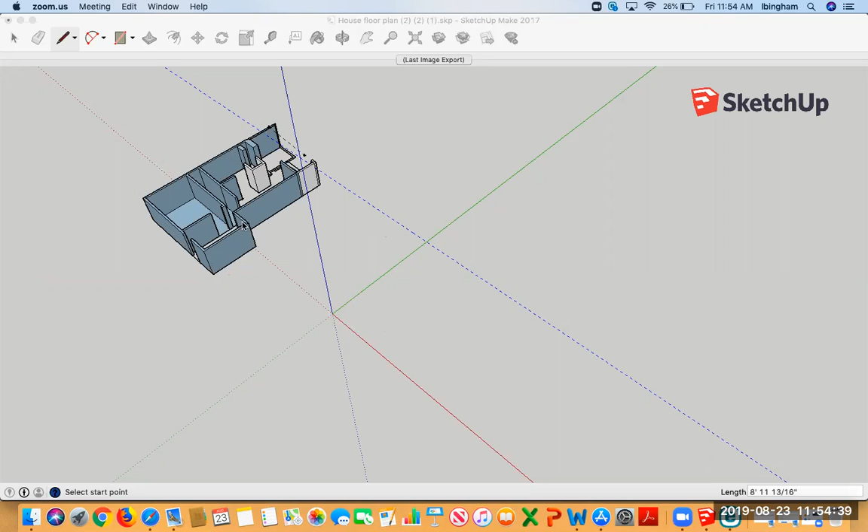And I think that's what caused all of the problems that you're having. So I did some quick measurements. I don't know if they're exact, but I just want to show you how to restart this.

So I'm going to keep this here as a guide, but I'm going to use the pen tool, and you simply want to just create the shape of your house. I'm having a little bit of a hard time understanding this section right here, but I'll just kind of make it up and then you can change it as you need to.

So my quick measurements show me that this first wall, this whole side of the house right here, is 25 feet. So I'm going to start by drawing a line that's 25 feet.

What was happening to you was because you didn't start right here in the corner, I think a lot of your lines, see how this line is black like this? A lot of your lines were like that, and that means that they're not actually on the red or green axis, meaning they're not flat. So like if I drew this line right here, it might actually even be going up and down in space and not straight across. And so a lot of your walls are actually at different planes.

Some of them are higher than others, and so they're not connecting well with each other. So this first wall is 25 feet. My pen tool actually wants to stick, see that? It sticks to the red. So I know I'm on the red axis, so I'm going to type in 25 feet. So there's my 25-foot line.

Then I come this way 12 feet. And notice how, again, my pen wants to stick to the green axis. That's good because I need it to do that. That's how I know I'm still on the same plane. If I draw a line that looks like it's parallel to that other green axis over there, it's not actually parallel, and that's where your issues are coming from.

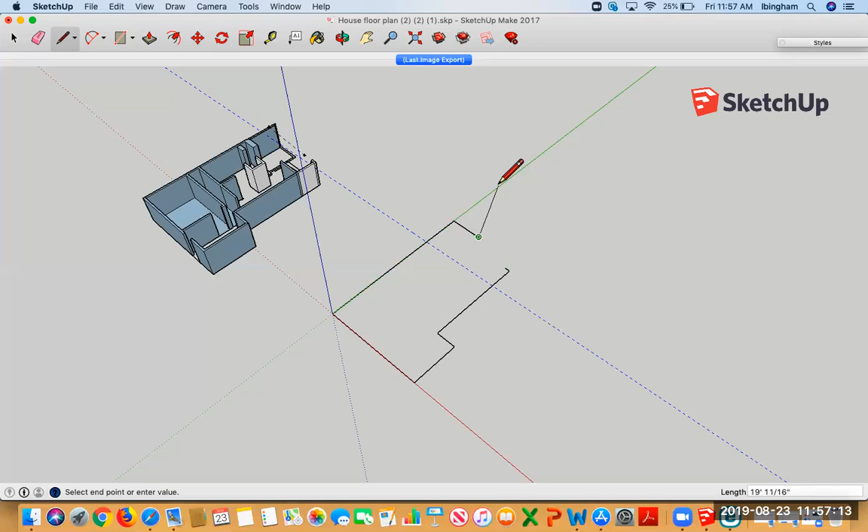And now what's going to cause problems is if we don't actually connect to this space. So if I look at your model over here, what I'm going to try to do is I'm going to actually just kind of connect to this here.

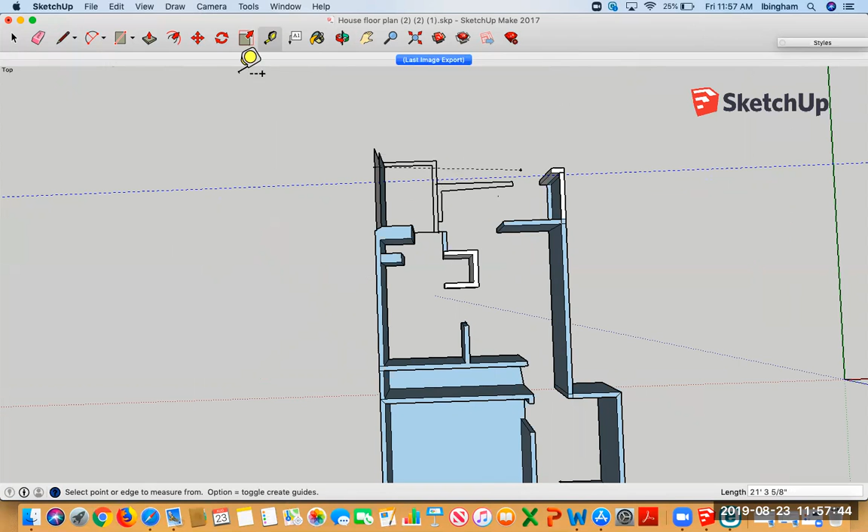So let's see how big this is right here, from there to there, 2 feet 10 inches. All right, I'm just going to call that 3 feet for now. You can totally change this if you want to. But this comes in 3 feet on the green axis, which should connect those. That's perfect, that's exactly what I want.

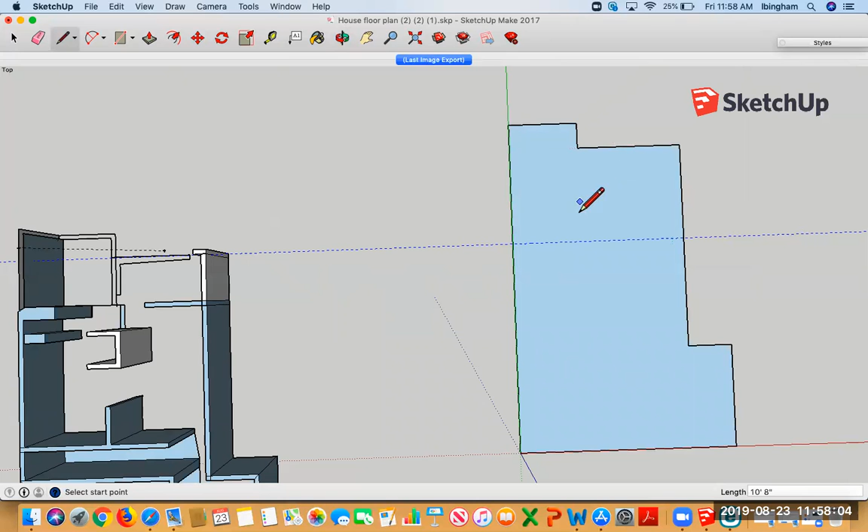So now I have the basic shape of your first floor plan. And notice how it's blue, that's how I know it's all connected. It's perfectly flat, perfectly flat. See, even from this angle, you can tell some of your walls are actually lower than others, and that's what's causing you a lot of problems.

So now that I have this shape, this is where I can make that 6-inch wall all the way around. And then once you've done that, you can actually draw in the other walls that you need that are inside of this space, and then you can cut out different sections of them.

So even I'm having trouble remembering how I got to extrude that. Let's see, the offset tool, I believe right here. That's what we want. All right, so we're using the offset tool.

Now we can get our 6-inch wall, I believe, is what I told you to do. There we go, and we'll build outwards. So 6 inches, there we go. I need to delete this inner one here. All right, so now that gives you a 6-inch wall, and you know that this is all perfectly flat.

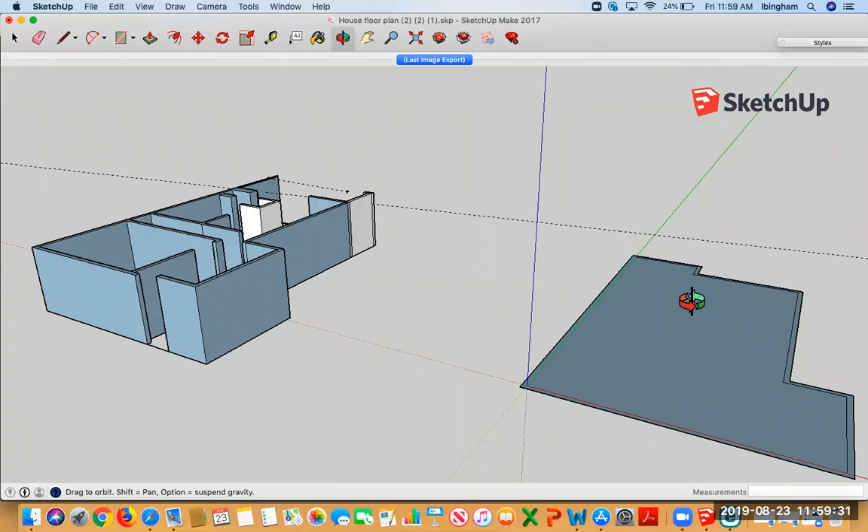So now what you can start to do, and another thing that might be helpful to you too, is to actually view this from the top before you push and pull. You can do that by going to the camera, going to standard views, and clicking top. And now we're looking from the top.

So now it's very easy for you to see that 6-inch wall all the way around, and you can actually start to use the pen tool again and just draw in the other walls that you need. Let me show you what I mean by this.

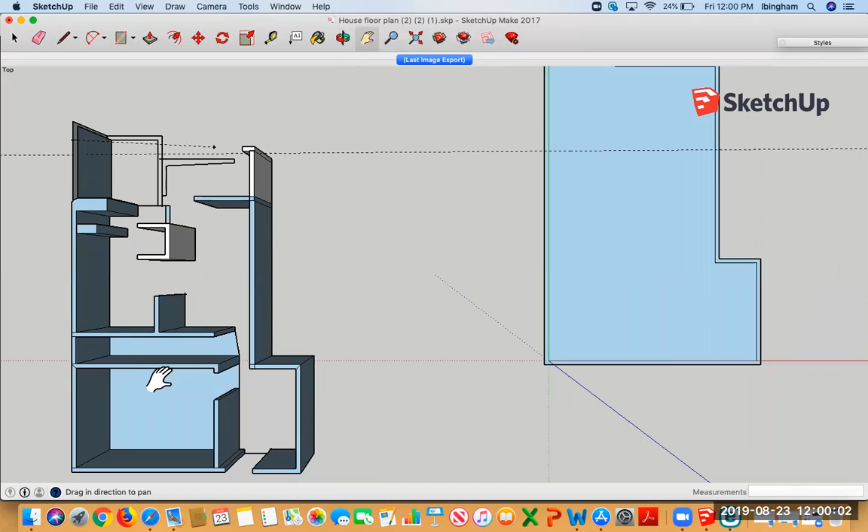So for instance here, I'm not going to do any measuring because that will just take me too long, but just so I can show you, like you have a wall over here, this one right here. So I'm going to actually draw that in here.

Say it comes to like right here. I would be putting in all my measurements, but see, we're on the red axis or we're on the green axis. It always has to be that way, otherwise it's not flat. And you want to draw in every single thing that you have here.

Like here, you could make a new shape in here, and that's your doorway. So eventually you just cut that out.

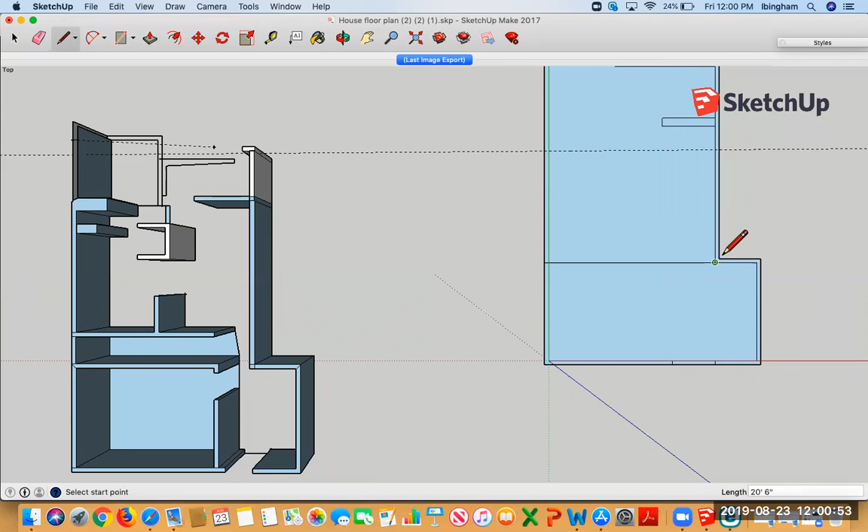And then like you have a wall over here, we can actually make, if this is lined up correctly, we could... there we go. And so then you could figure out like how far it comes out, and then you would

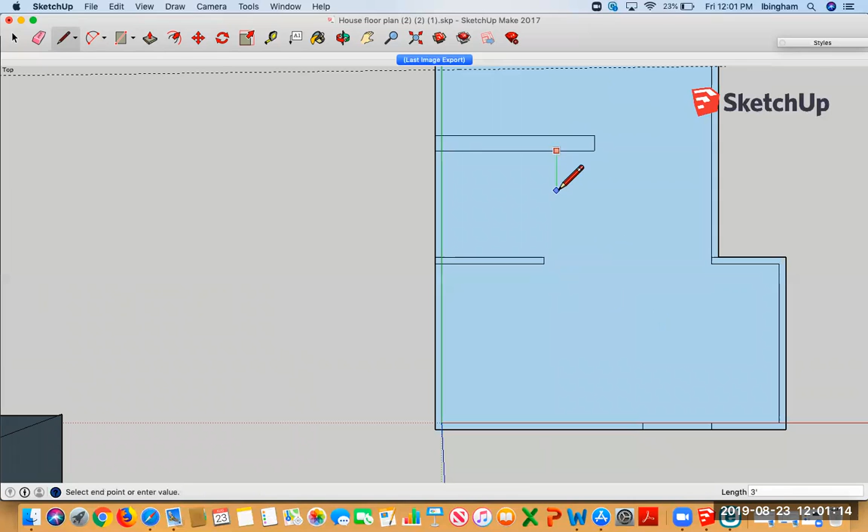just erase this section. But once you do this and you have a bunch of different walls coming out, say you have something even coming out of here, notice every time I draw something it's on the red or the green axis. So now once you've done this, then you can push and pull, and it's so much easier.

Here it seems like you had too many things to push and pull. You want to have very few. So once I go to use the push pull tool, now that entire section of the wall comes up instead of just a little section.

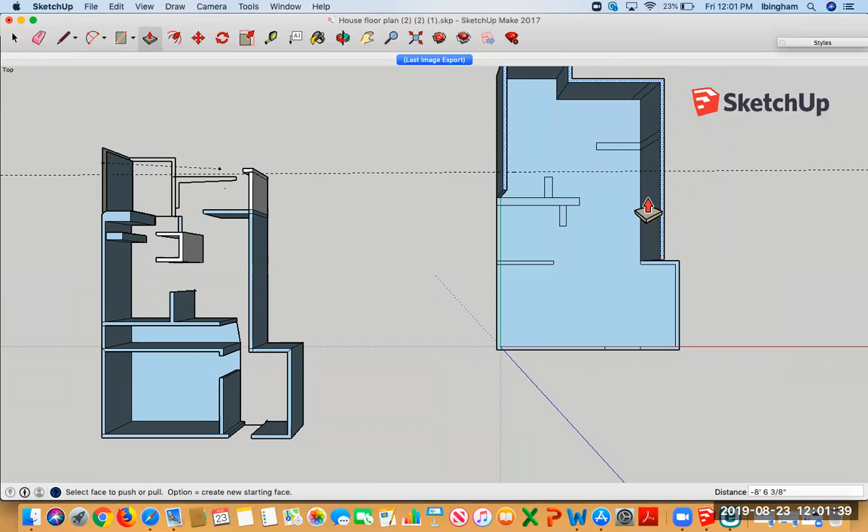And then here I could pull this up, pull all these up. It's just so much easier. I really hope that this makes sense. If you're still confused, please let me know.

I'm going to get rid of what I just did. I'll keep that basic shape. You can edit it how you need to, and then redo all of your measurements and draw it in. I'm sorry you have to start over, but I promise it will be so much better once you do it this way, and it will make your life so much easier when you're working in this SketchUp file.